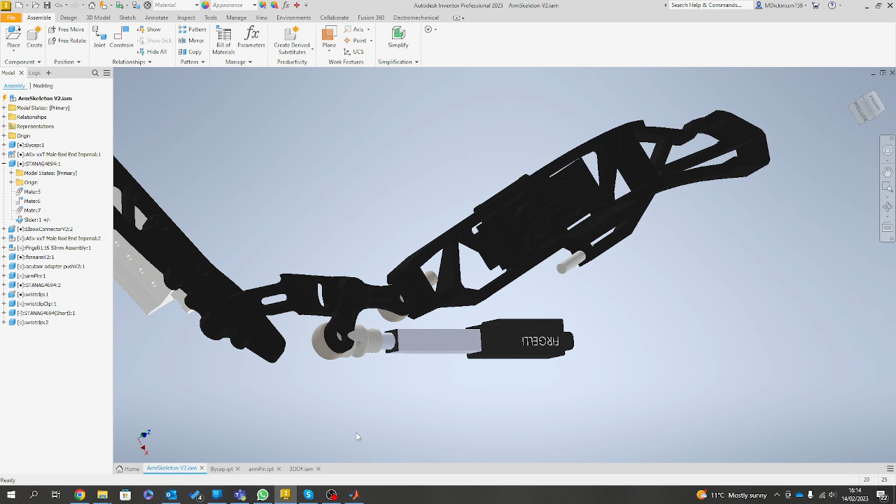So what I'd like to do is go through a simple example, which is this one. For those unsure what system I'm using, it's Inventor. I know at the university we teach SolidWorks, but the beauty of Inventor is to do with licenses. I find Inventor a little more supportive.

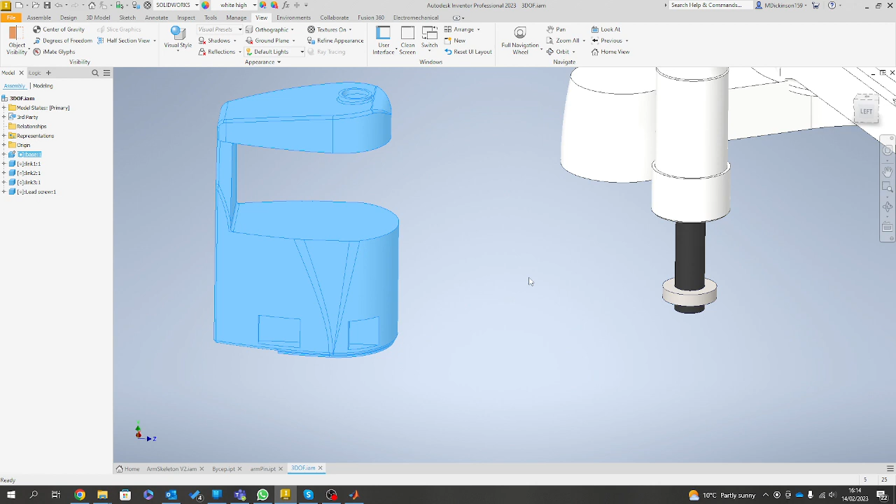So what I'd like to do is introduce a 360-degree joint around this one. Let's just pull this apart to give people an idea of how this thing is meant to be built. So I'm going to ground the base piece for where the arm mounts, which is here. This is assumed, well, it is actually ground. This is assumed to be an assembly.

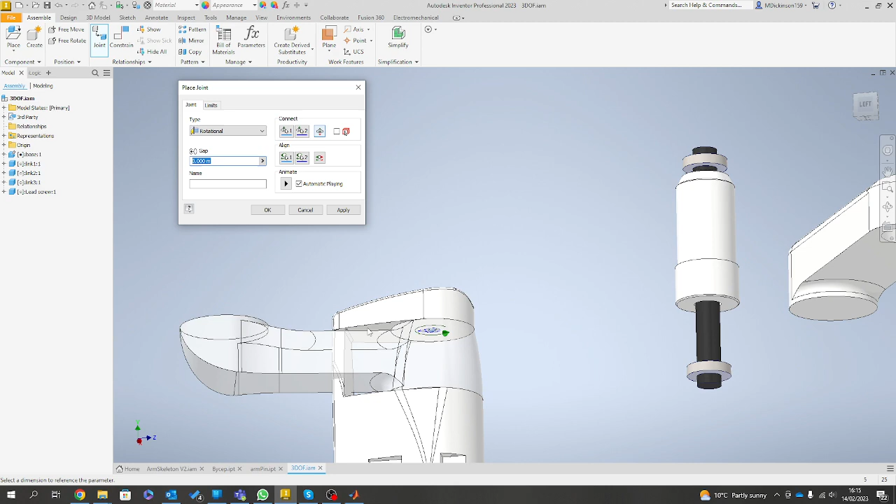Keep in mind, in your assignment I'm going to be asking very much the same thing. You're assuming a certain element of this. Some of the parts I'll give you are actually real company parts, some I fabricated myself, and some I pulled from reference places like GrabCAD, just to give you an example to operate with.

Now what I'm doing here is just applying the constraints. Those who've never used Inventor will probably start looking at this and think that was very cool. The joints constraint function, for me personally, is unmatched in any other system. I think it's fab, but anyway, this isn't about the CAD systems, this is about what we're doing here.

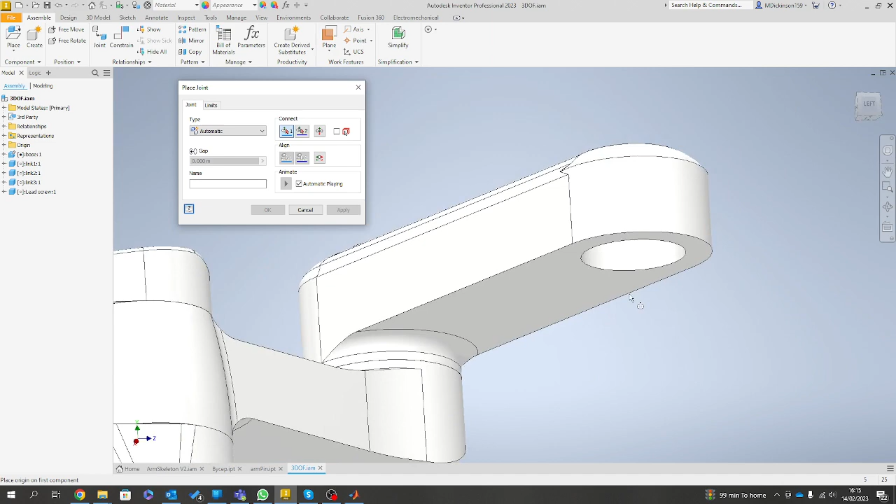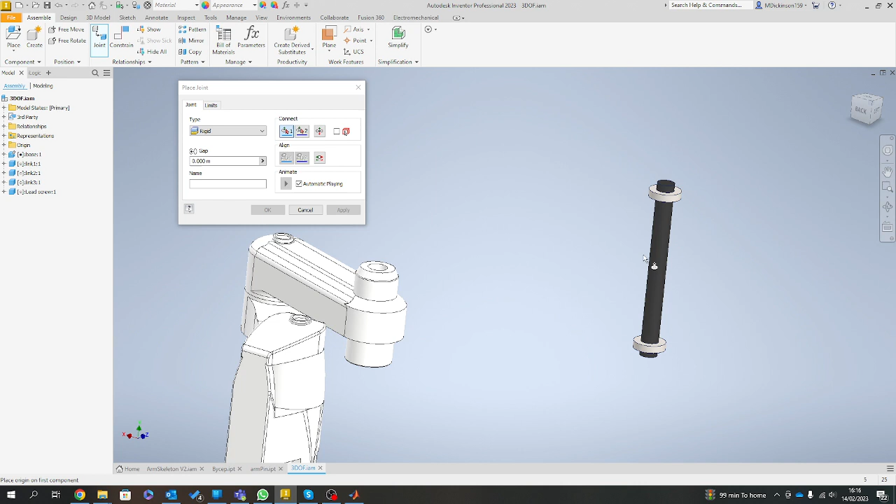So what I'm going to do is use my joints again, put a fixture there, and a fixture around there. Now it'll ask how I want it to function. I don't want this to be anything, so I'll just make that rigid for this case. Let's apply that. So now we've got 360 degrees here, 360 degrees here, and a mount point here. Arguably this looks like some type of rigid structure where it could actually slide backwards and forwards, so let's put a slider in here.

So if I go again—this isn't really MATLAB, well this is a MATLAB session and we've ended up talking about CAD. Really this thing could slide up and down. What I'll do for this case though is make that rigid too. Apply this, and that's really how our system is going to function for this quick example.

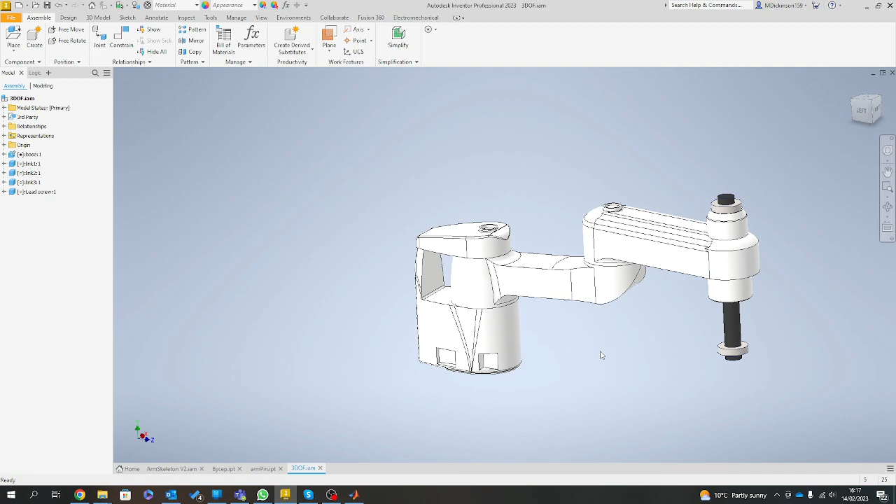So we have one here and one here. What I'd like to do is simply test this system, coming from over here, holding its position, bringing it right the way across, and then getting it to do a cycle in and a cycle back, something like that. But what I need to do first is decide how this is going to work.

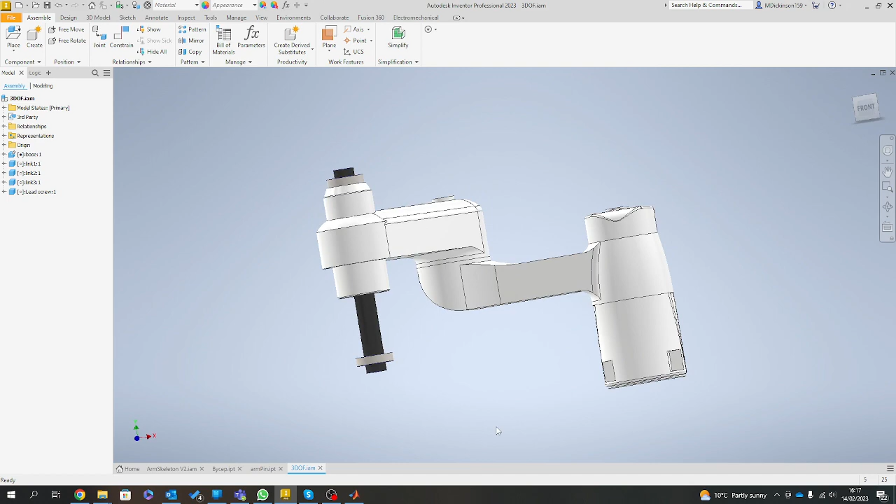As we're well aware by now, this is my base point, so this is going to be the point where I'm going to start from. So I'm going to minimize here, and I'm not messing around—I'm going straight into Simscape Multibody.

So I'll drop into Simulink, and as ever, we now wait a moment. This is on my home PC, so it's a little quicker than what we get with the university options. So again, blank option.

We've done this so much now that I'm not going to make slow, massive steps through anything, because I'm well aware you guys should know about the base thing we do every single time. We set up that base testing element: this will be our solver, this will be our rigid transform to give ourselves an origin, this will be a world frame, and our mechanism configuration. Once we get all this into play, let's get this built, and then let's take a look when it works.

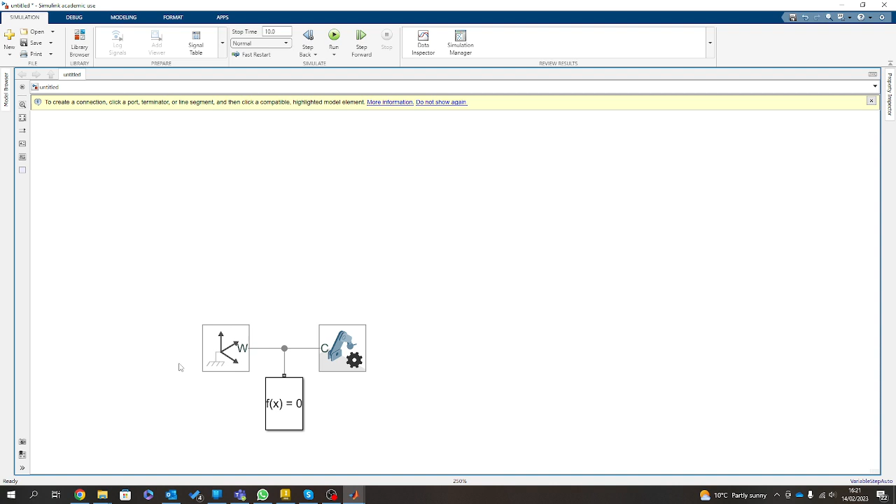Lots ask me why I always do it in a triangle - it's just because, yeah, it doesn't matter. Anyway, let's move on.

So this is what I'm chasing - these components are all in the notes, by the way. There is no write-up for this, so this is why I'm recording this session, because I appreciate some of you will want to give this a go anyway. So let's get this built.

First things first, I'm going to go File, Solid. Let's bring that in. Let's just call this base.

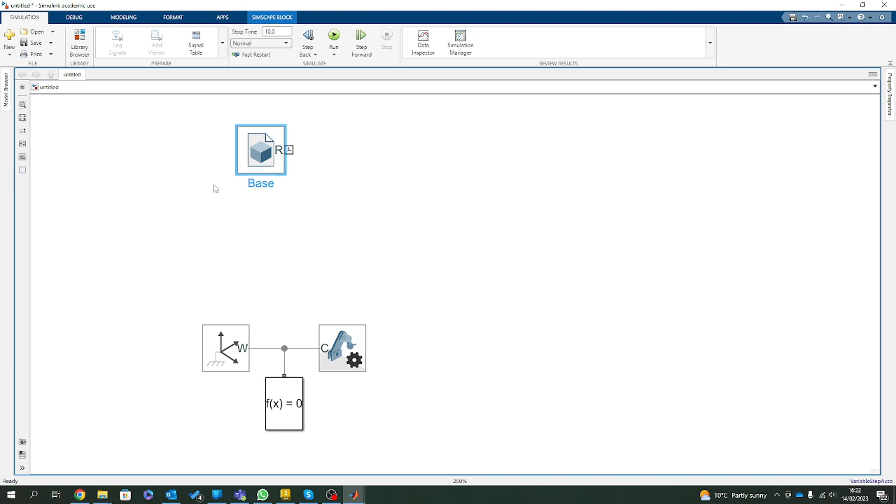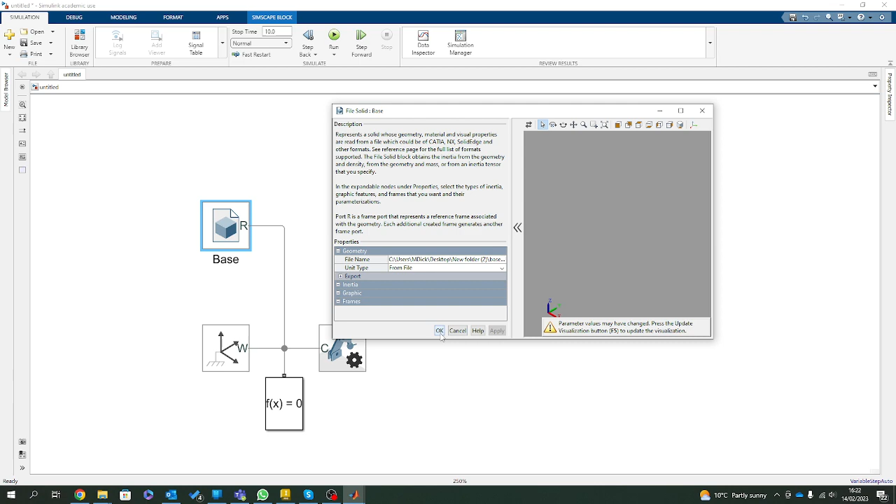Now the beauty of this is I'm going to be really sneaky - I'm going to use something called frames, and this is quite nice because those of you who go through this video will be like, ooh, why have we not done this all along? I've not tried to be awkward or difficult, but it makes life so much easier. I wanted you guys to go through the pain of building these things, and then when you realize what frames do, you'll be like, oh my god, why have we not done this sooner?

And am I sorry? Not really. So there's my base - I'm going to choose a density. Let's go custom mass, something relatively heavy-ish for a single base, so I'll go 4 kilos. Update that for 4 kilos - that gives my density and moments of inertia.

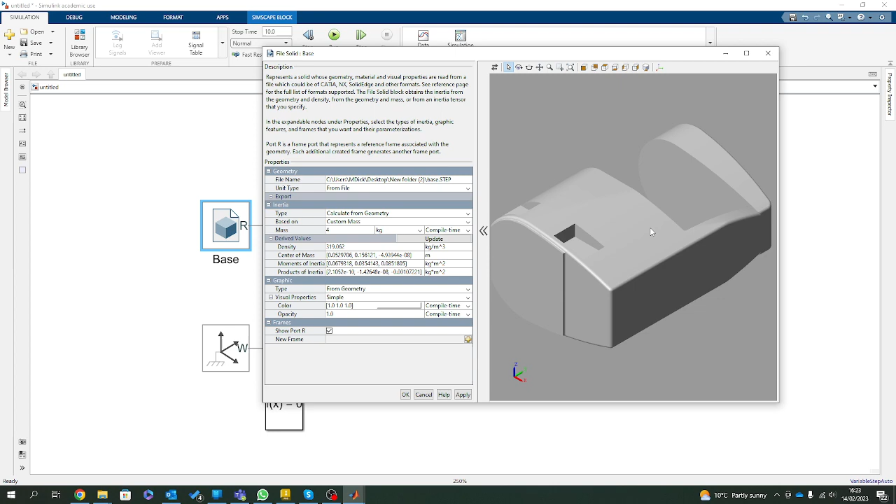And then, right, so this is where you're going to go, what? Well, you might do, I'm just saying. So there's my base - I've changed it white just because, well, the original was white.

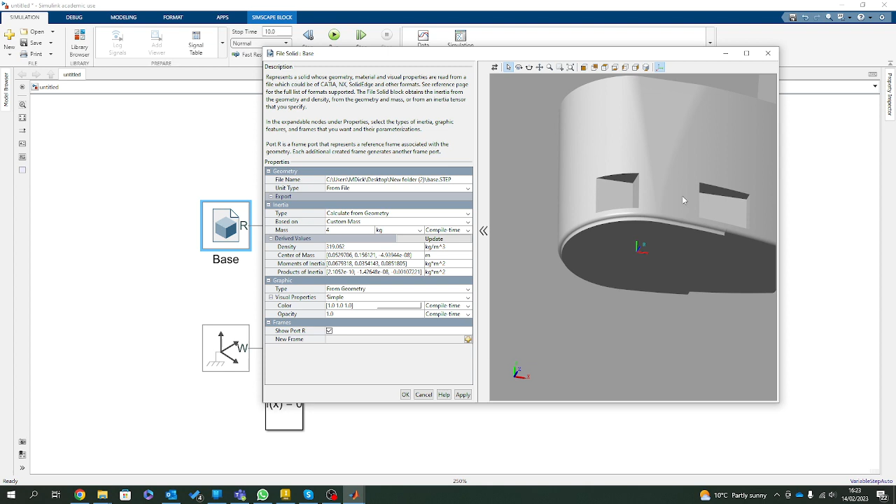So what I'm going to do is use this top as my key point of frame - I'm not going to change that R. That R, if I slip onto my piece, actually starts from the base. But we do have some problems - oh my God, do we have problems - Z is in the wrong axis.

I'm going to apply there and bring in a new frame. I'm going to go dead steady - well, I say dead steady, you guys can hit pause or rewind. So what I'm going to do is click on the top edge. What am I going to call this next one? Let's just call this arm link, or AL1 - arm link 1.

I want to use the geometry reference. I'm going to click on, and I'm going to use that one. See how I clicked on the edge there? Now look at that, see how that just shows me where my center of axis point will appear when it appears. So I click OK.

Oh, right, so let's zoom that in a little bit more. Look at where the reference sits. Everything defaults itself to Z. Pain in the backside, nightmare. So what I need to do is get that Z to flip itself up.

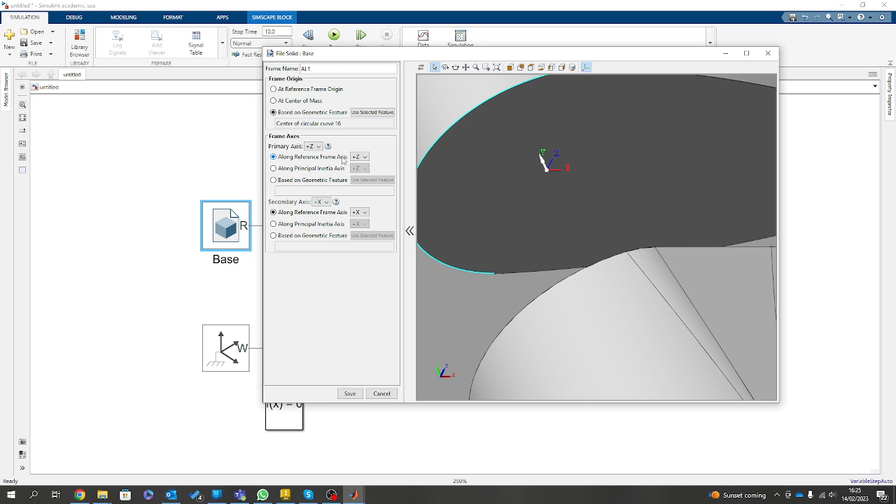What I would like to do is make Z where Y is. So what if I say make primary Z along the reference axis of Y? Ooh, all that messing around that we did in past sessions all solved in one single step.

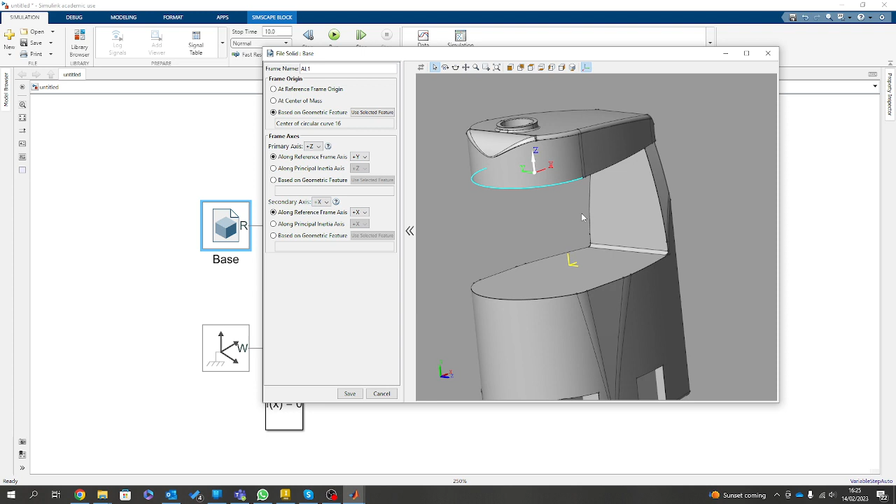However, if you're on a closed loop, you've got to be aware of where you've changed and when you've changed. So this is cool for robot arms, very quick for robot arms. But for something like a closed loop system, like an engine and cylinder system, anything like that, it can be a little bit more tricky. Not impossible, but a bit more tricky.

So I'm going to click Save and then Apply. Now what happens if I flip this little bad boy over? Now what happens is I have the base that's connected to the ground, and then I have AL1, which is now telling me is the connector. Boom. So what I'm going to do now is go revolute.

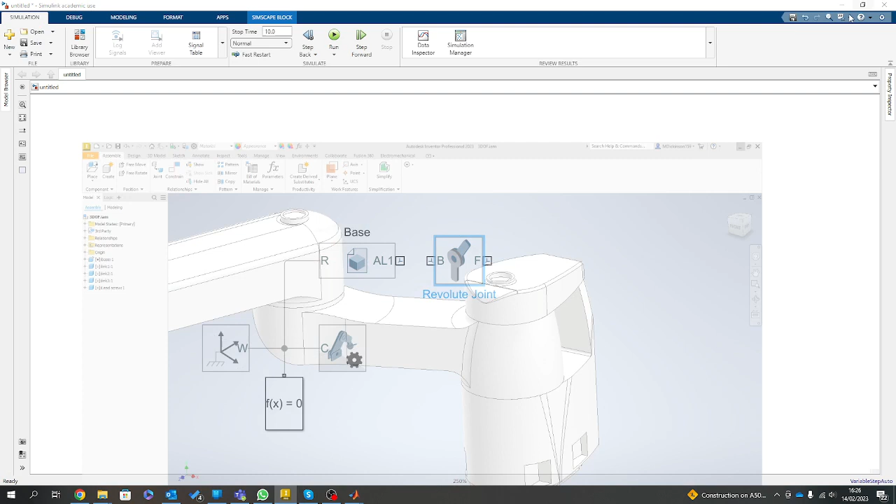Again, I'm not insulting intelligences, let me just have a quick spin. You look here, this thing revolves. Base to follower, base being the joint of the robot, follower being the arm that is connected to it.

Let's bring that across. Or in fact, in this case, let's not. I think it's probably going to be better to just build one from scratch. We'll go File Solid, and let's just go, I don't know, bicep, whatever, arm. 1 or 2, whatever, Arm 1.

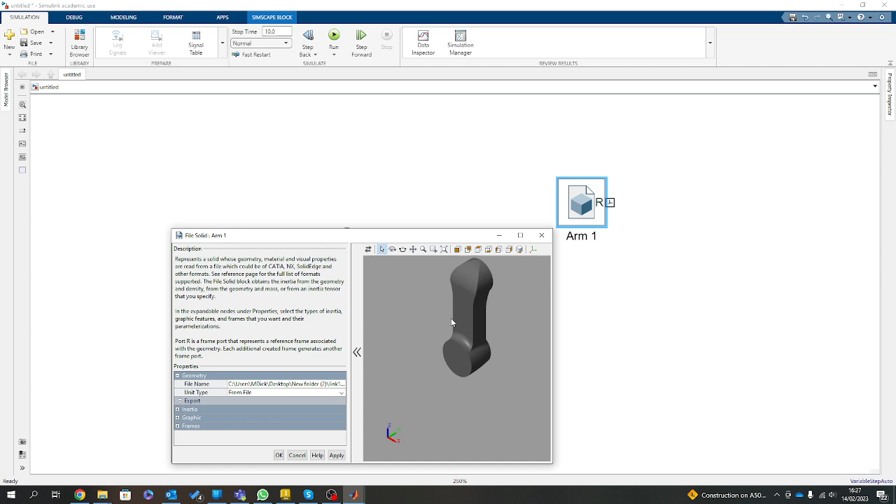Right, so back onto here, and then we go here, and then we're going to go link 1. F5. Boom, that's my link 1.

Okay, so I come onto my joints. You look, now this is annoying. You look and you go, what tool did that? Look at that, you see where the actual Z is.

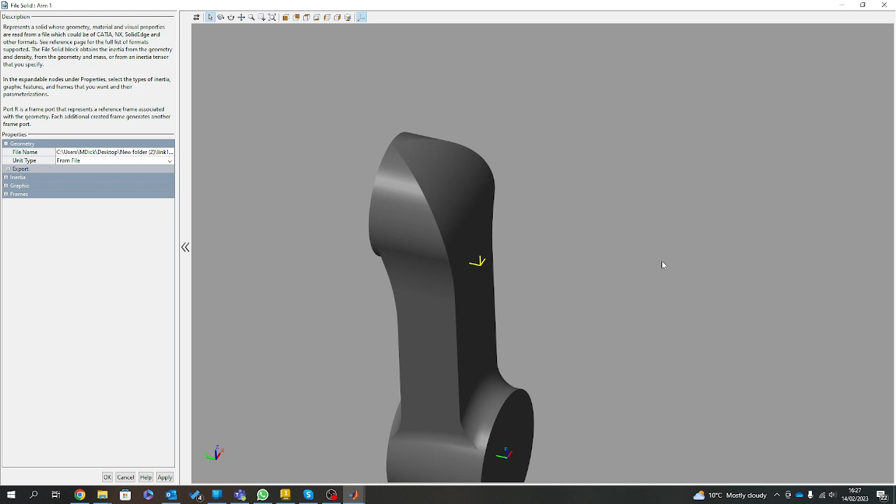So I mean, really, when this was drawn, it was drawn like that. Anyway, I suppose it's relevant. I didn't draw this, I didn't draw this, it was a company download. I thought it might be just good for a bit of an example.

Okay, back to the point. So we're going to go back again. Let's put some material on this, let's give it a little bit of density. I'll make this a bit lighter, so let's go 2 kilos, give that a bit of an update. And then, because if I knew the material, I could set a density, as we all well know.

What I'll do is drop that to here, and then come out, and then set that to a white. F5, there's my white. And then I need to set a frame. Frame in this case, again, let's go the arm link. This is base. Oh, arm link. Set by geometry.

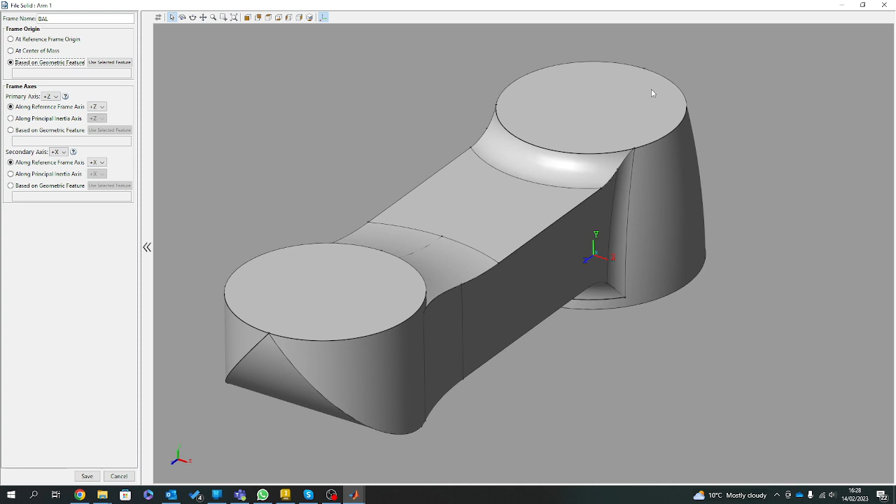Apply. Again, I'm following the same thing, I've got to make sure it's in the same process here. So I'll go set that to positive Y. And what these will do is link each other together. It's the same thing as anybody who does constraints - if you do a constraint, you've got to do it so it actually follows suit correctly.

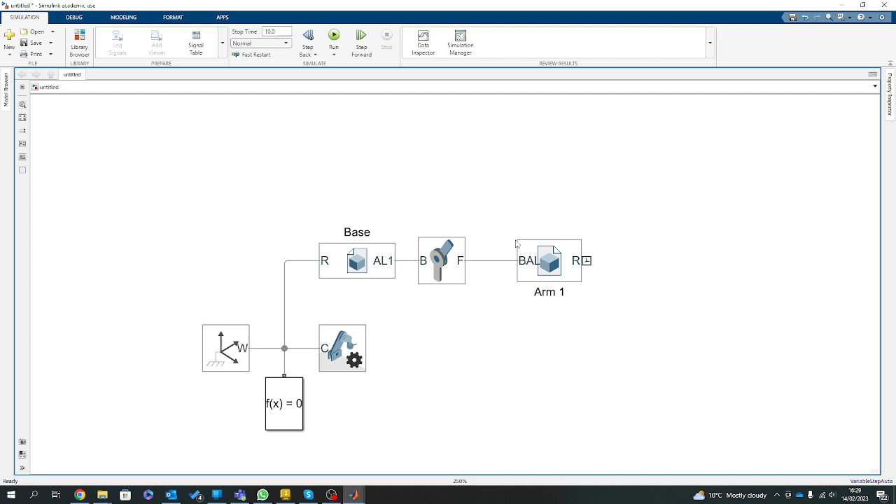So if I click there, what I should get in a moment is an arm, which, don't get me wrong, there's probably going to be collision, but I don't care. Just want to get this in position. Once it's in position, I'm in a great position, because I can then begin to look a little further. Spin it up. This is a great start.

So what I need to do, will just keep, because this just thinks that it's an ultimately perfect bearing. It's going all the way through. Useless for what I want. Okay, right.

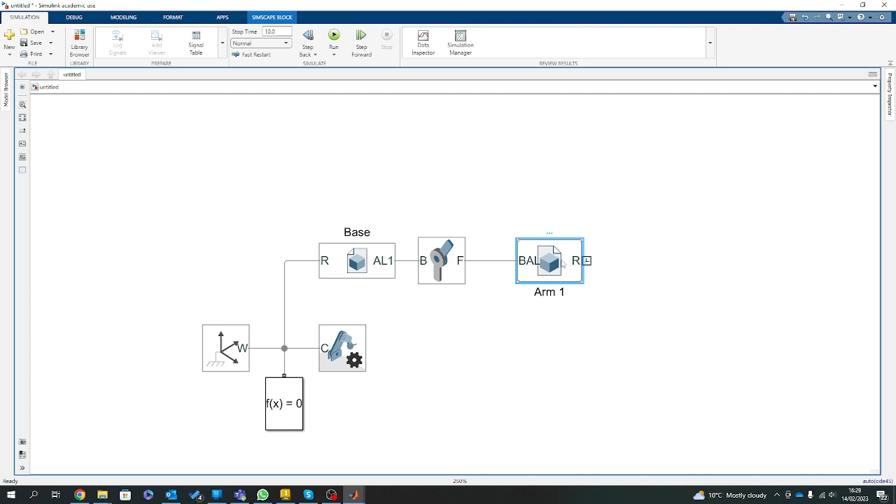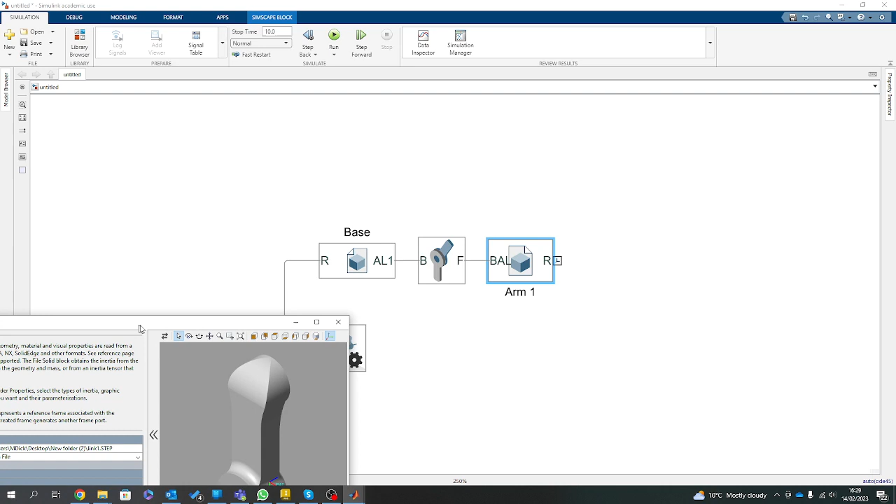What I now need to do is bring this back up a little bit, and I need to add another frame, because if you notice, my R in this case is useless. My R sits over here, so I'm going to pull the R off completely. Press F5. Now what will happen if I come back, you'll notice, if I click apply, you'll notice, let me pull it out.

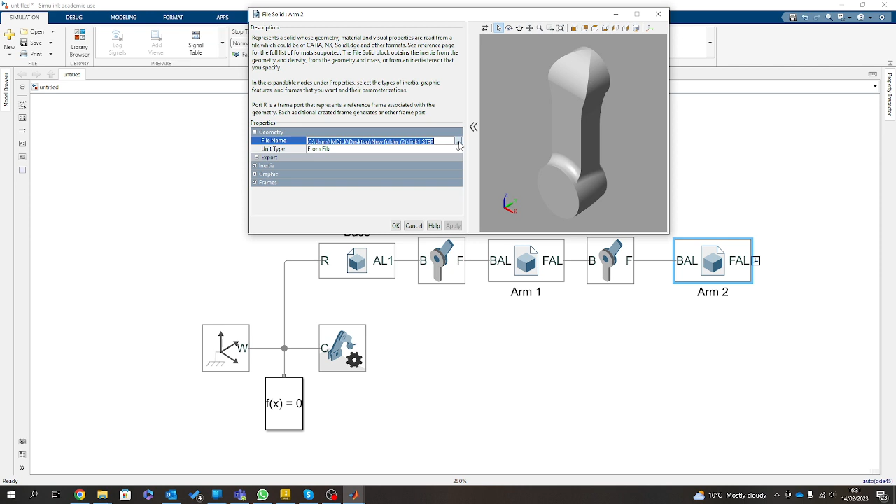You look now, I've now got the front and the base, well, follower base of the actual assembly. This is so easy to put together now. It's, it has to be illegal. It's so easy. So, bring that out. Because you got to remember now, I'm just doing the same thing. Bring that across. And this is arm 2. Oh my God.

So what I'm now going to do is just jump this across to my link 2, and then onto my link 2. So if I link 2 on here, that's my next positional point of link 2. Now, my base follower in this case is not there. So what I actually want to do here is just select it to mirror what I've done here. So it's there. And then click save at that. If I go back to it, what it should do is not move, which is perfect.

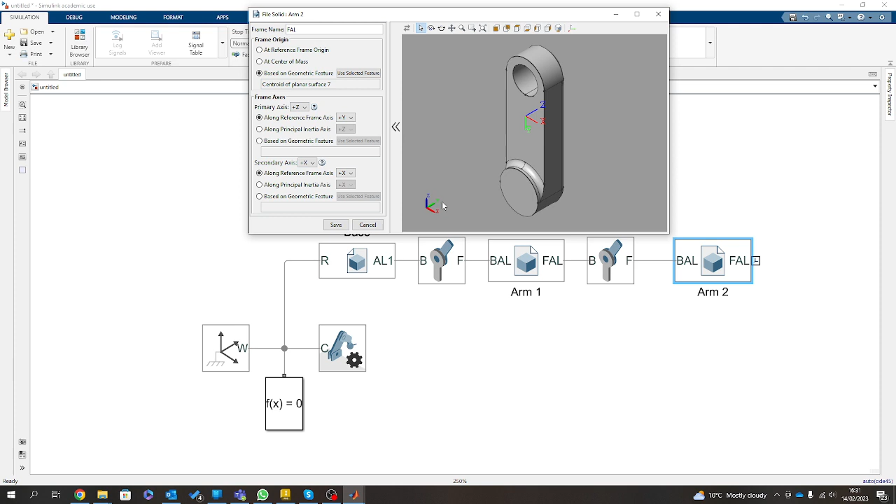So there we go. Click save. And now what I should get is the base of what I was after. So I'm going to do the same thing again over here, but this time what I would like to do is do it just from above. Now you notice we're actually now operating to a hole. Not perfect, not impossible. So I click apply and save.

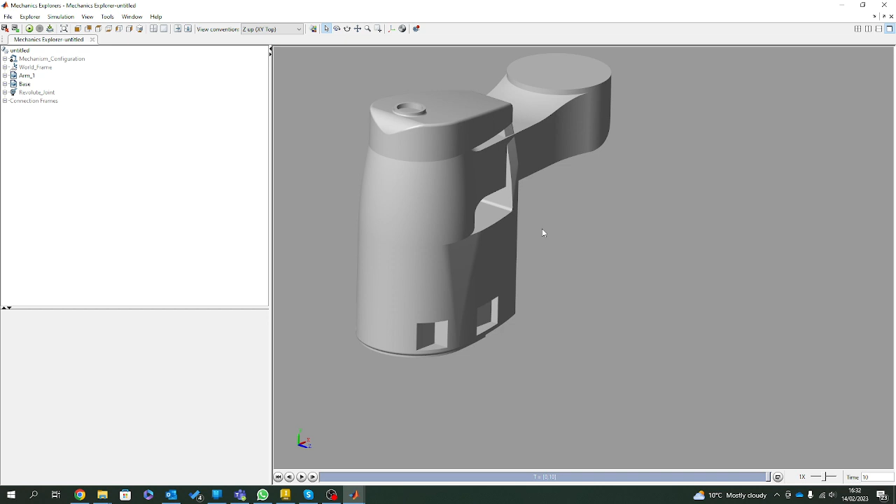Again, you'll notice here I'm going so quick now, as I said, it gets really easy. So I'm going to run that on 3. Oh yeah, you look now. So if I'm just to reflect back on the original design, the only thing I'm missing now is this piece. So let's get that next piece in, and then we can actually look at where we are.

So the next piece is a little bit tricky. What I'll perhaps do is I might just put a weldment in. A weldment is assumed that when this puts into place, it is rigid, that this thing is rigid in place. I can change that, but I'll just go with the weldment in this case. So let's go weldment.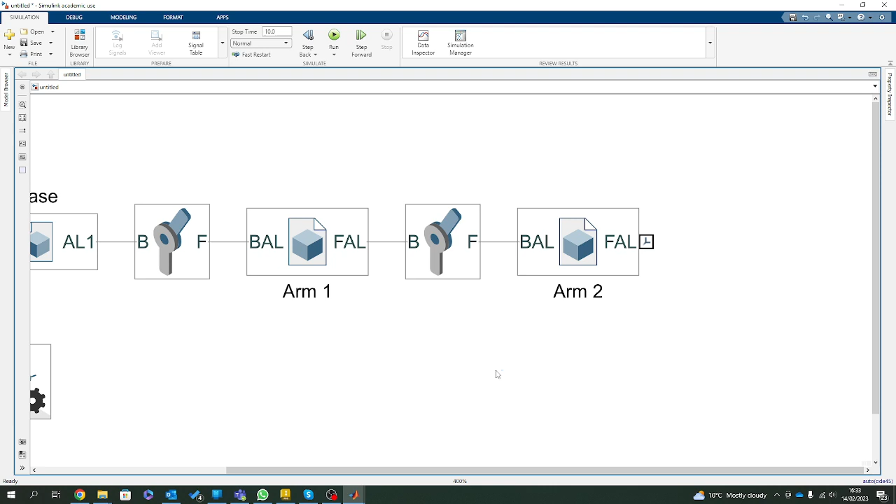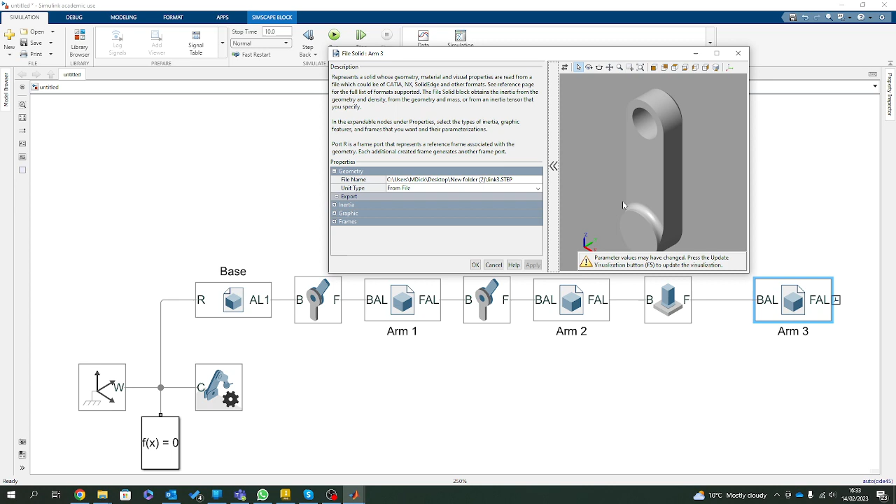This weld joint, as I said, will allow me to bring in the final piece. So that's 2, let's go 3. Yeah, what's happening now is it's complaining because it's saying you've got all these frames on here, but it's not sure exactly what the hell it's meant to do.

So with the file, I'm going to drop that off for the moment because all I really want is just to look at this thing in motion first. Let's just edit this. Now let's go to edit. So what I now need to do is just bring this round and then give it a position, which I will state the position from this particular point, and then save.

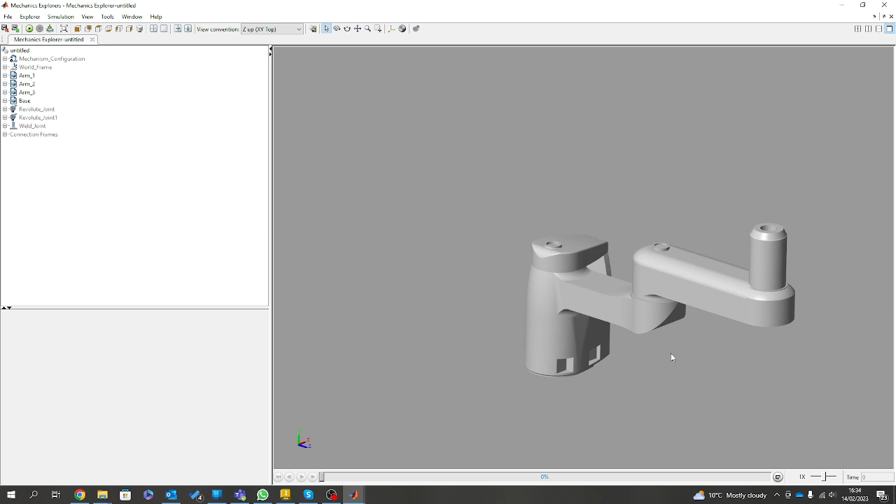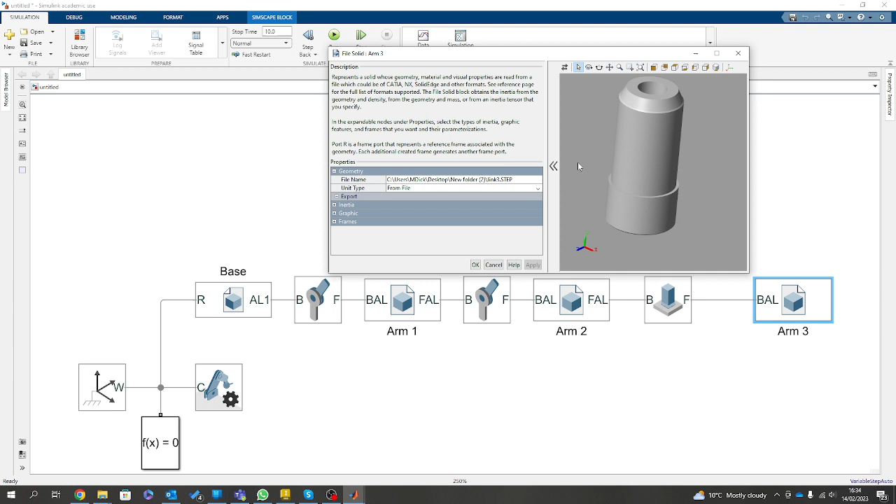Let's see if this works. Click apply. I think there's a problem with that, but I'm just going to have a look. So let's bring it in and go update. Now, see that? That's clearly upside down. That is because the actual part was probably drawn that way. When it was drawn, it was probably drawn extrusion, extrusion, extrusion, which, you know, fine, whatever.

Doesn't make my life any easier, but it doesn't matter. Where I've got it passing down the positive Y, I'll just shift this to a negative Y. What it will do by default is invert the actual selection. So if I come back and then update, now I've actually got what I was after. Now if I just run this, just to check, what I should now get is this thing spinning like bonkers, just going crazy, really. Right.

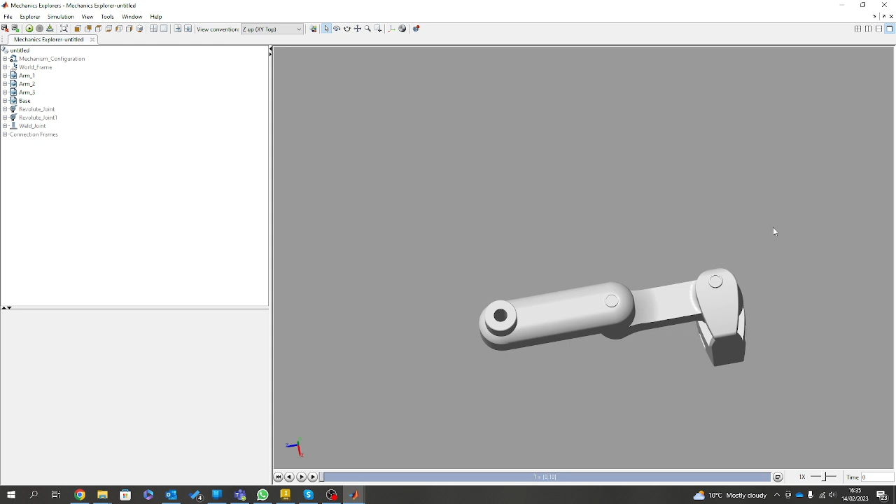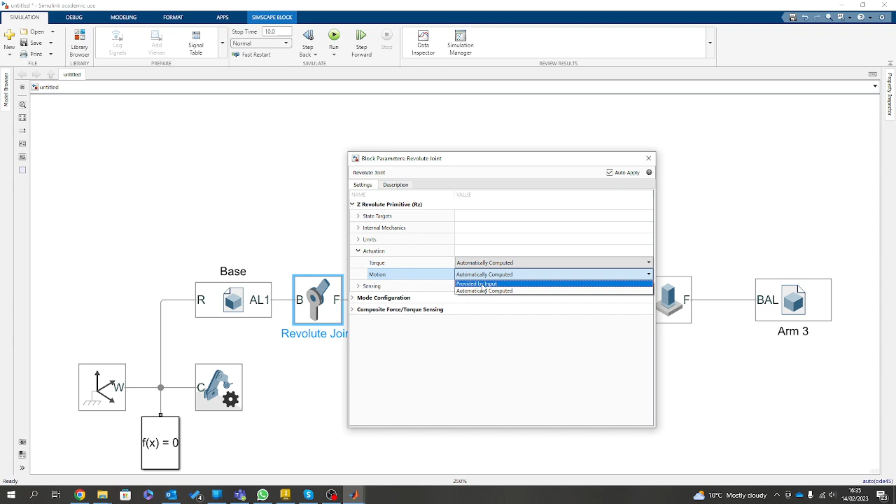Now what I want to do is I would like to perhaps do a 90-degree fixture. Let's go 90 degrees, and then let's go minus 90 and then 180 for the end. Okay, so under the first one, this is going to go 90 degrees. So I'm going to go actuation. I'm going to have torque automatically calculated, but now I'm going to provide motion, which is ace for stuff like this. It is insanely cool what it can do.

So let's come back and then jump into, oh, I've just gone blank. I remember, right. So this we now need to bring in because we're going to control with a signal control. So I'm going to go Simulink to physical signal converter.

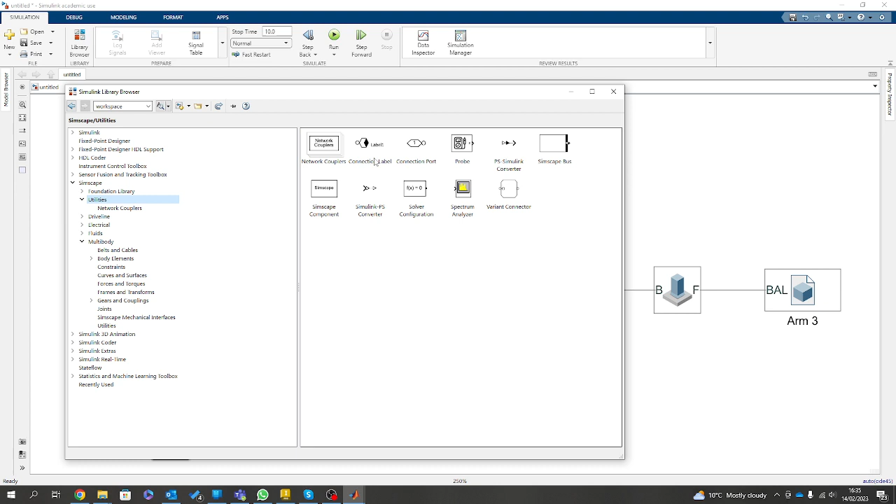So bring this to here. This now is going to give me my all important control unit, and I'm going to do signal. In this case, I'm going to do the signal builder. For those thinking, well, we didn't do that - we did, this is week 1. Don't forget, all signal builder does is it offers a unit, that's all it does. So I'm going to go degrees.

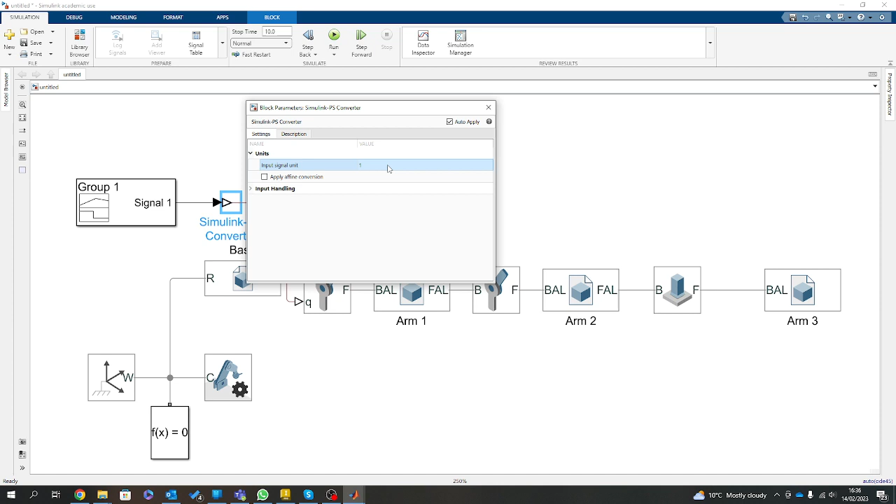I'm going to signal builder, and let's see if we can get something moving in the right direction. So we're running over 10 seconds. Signal builder is set to 10 seconds. What I was saying is over 5 seconds. Well, let's go over 4 seconds.

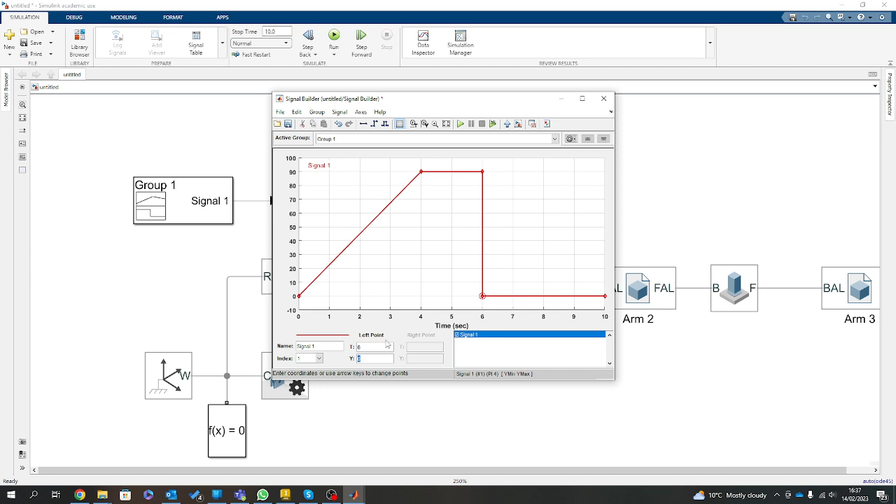We're going to get signal. We're going to get the robot arm to move from 0, and I want the arm to move 90 degrees. And again, 90 degrees. And then it's going to hold that 90. So this is absolute in what I'm doing right now. So it goes from 0 to, at 4, 90 degrees, and then holds that 90.

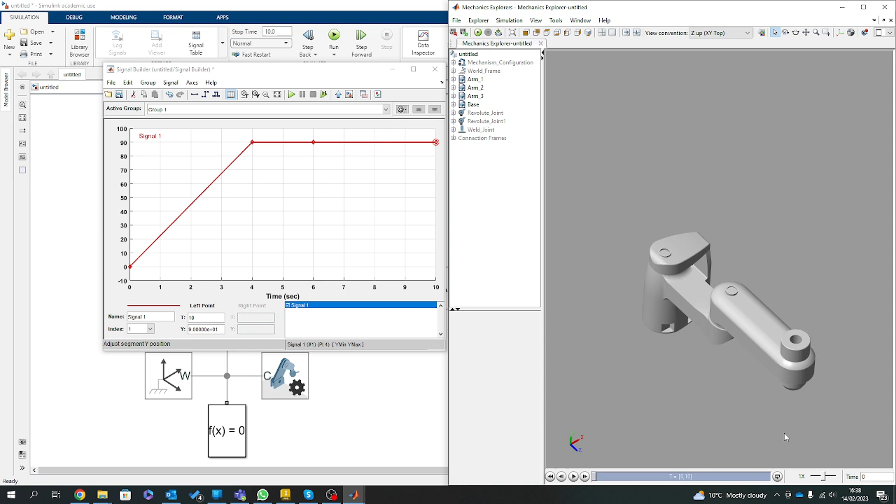Now what I need to be sure about is: is this going even the right way? So let's check it, bring it in, bring it across, let's just get you into a good position. As I've said before, this software, if it was up to me, I would be a poster boy - I love this software so much. So let's just bring it in, let's run it, so as it runs, it starts to calculate.

Oh, look at what you could have won. Let's have a look. Oh! Right, this is quite good. I made this mistake - you guys are going to come across this mistake. And what's nice about this is when you first see this, you kind of go, what the hell does that mean? They are telling you everything there, interestingly. But if you've never come across it, you kind of go, okay, yeah.

Okay, let's just jump back into here. Now, I made this - I'd love to say I meant to do this on purpose, I didn't, forgot. Remember, I'm actually going to offer a motor input. With any particular motor input, we know it's going to be second derivative just because we're going to have position, velocity, acceleration of that output. We're providing motion, not torque. So what I'm going to do is go to filter, drop down my filter, and then go to filter input derivative calculated. Ooh, I hear you say.

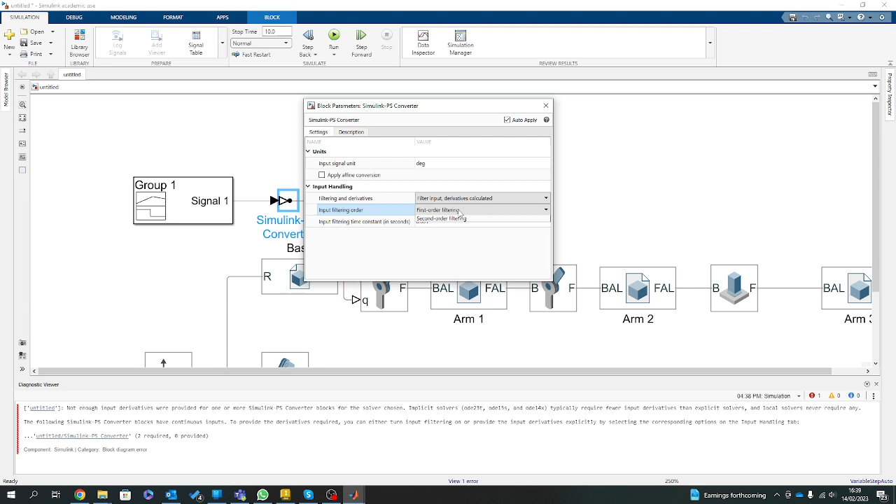So first order, don't forget, would just be taking into consideration the spring and damping aspect, or the resistor capacitor behavior. So all we really get here - what I actually need to give me the all important three elements - is that second derivative. So I'm going to go second order filtering. Now we're in business. So if I just come back, what it should now try and do is provide others. So let's just run this and see what happens.

Oh, no diagnostics. Now I've had students before sit there and go, okay, what happened? This is what happened. Now I know it looks like a total failure. Let's just recap exactly what's just happened here. So let me just get to a nice position - this is a nice position. Let's just rerun that again.

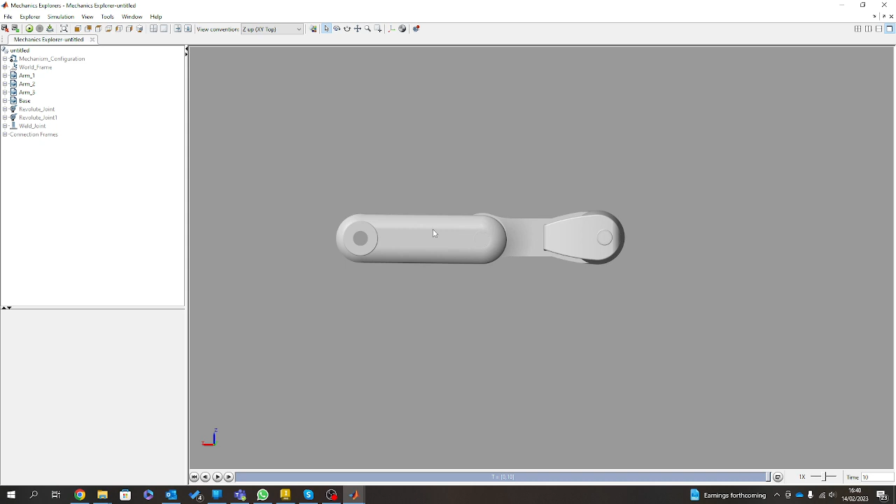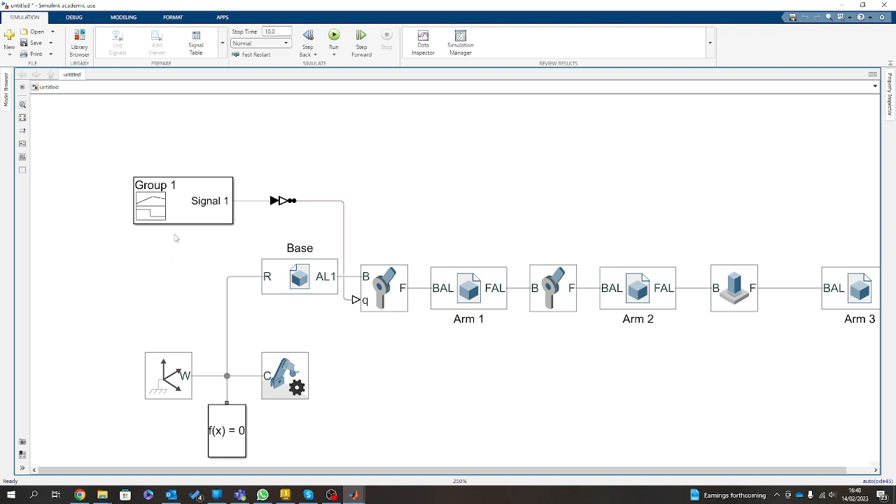We've just controlled the lower arm. Lower arm's locked into a 90-degree position and held it after the 4 second. We've now got a level of control. Problem is, I'm going the wrong way around. It happens, it really does happen. So if you do get that and it goes the wrong way, don't panic. It's just because you're going around the axis.

Funnily enough, I did know that this was going to happen, but I just wanted you guys to see the fact that you look and go, why has that happened? That makes no sense whatsoever. It actually does make a lot of sense, because this is absolute to its position. So that's all this is - having a bit of a wobbler about. Again, nothing wrong, it just needs telling to go the other way. So all I'm doing is going minus to actually control the behavior around the datum itself.

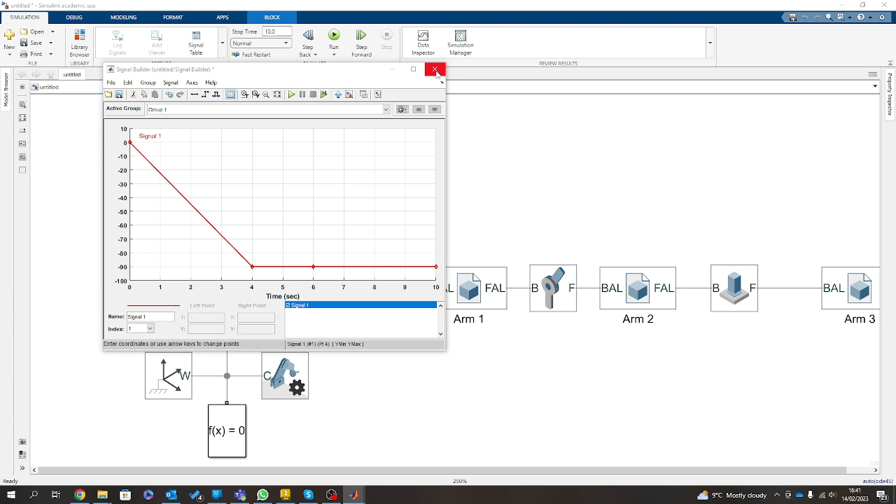So if I now run this again - oops, run this again. Oh sorry, recalculate. Damn. Right, see that? We're locking in, locked it steady, holds its position after 4. We can now commit to what we're talking about. Let's do a 90 and then a minus 180, so we should get a 90 across, then a minus 180, right, complete - then that will be our full cycle. Not the most complicated of cycles, I get that. However, it's a nice learning curve because you can look and go, okay, that makes sense.

So what I'll do is just come on to my next frame. And again, that was nearly a schoolboy error. But what I'm doing now is providing that all-important motion.

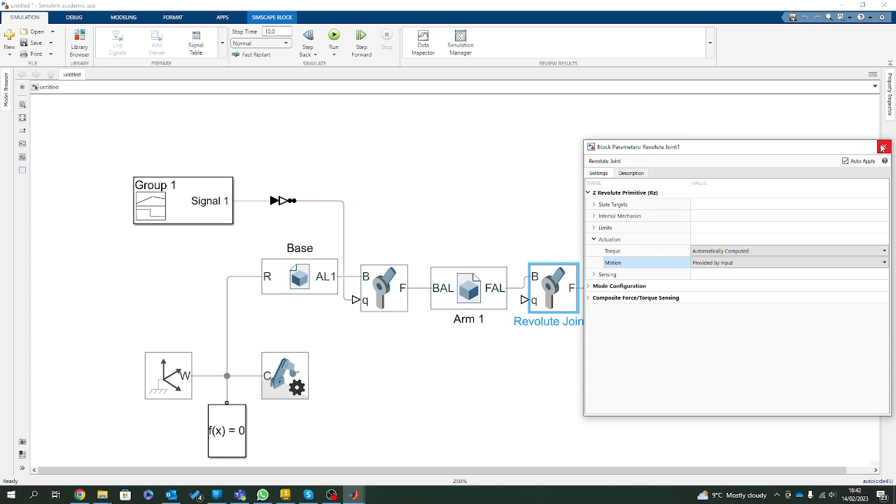So I'm going to bring that down, bring that down, bring that down. I am a stickler for having tidy representations of the work you are doing, so please keep that in mind. Just because it works doesn't mean it will cut it - I do prefer that you take that approach.

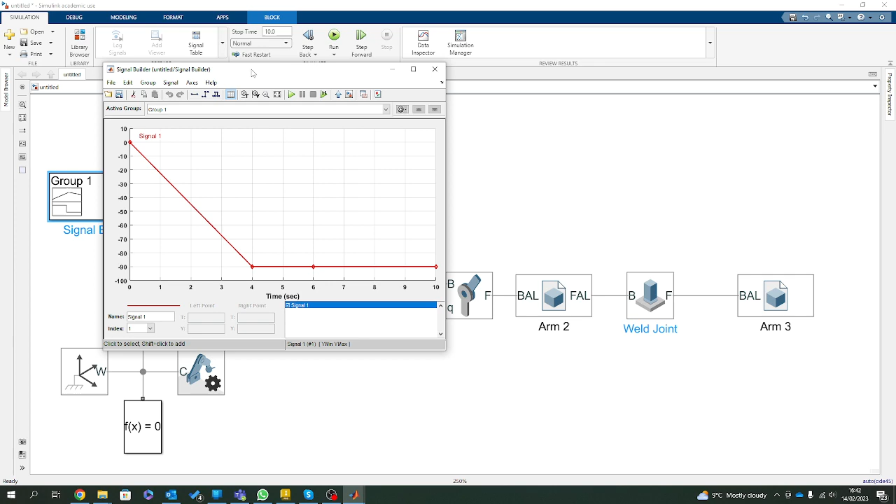So we know that we're going to hold a position and then we're going to go from our present state. Let's just push this back because this will get confusing otherwise. Spin this right the way back.

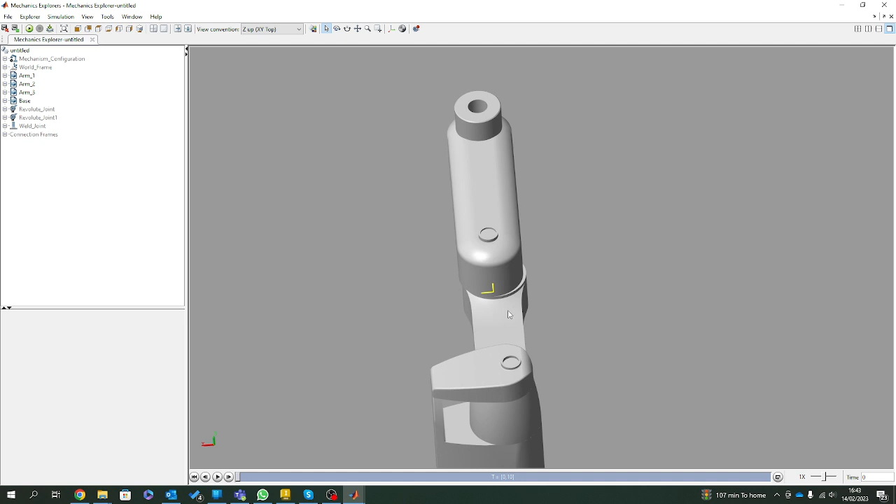So we're going to come from this position, and what we want to do is hold. I've just realised that is not middle - we'll have to move that, but we'll do that in a moment. Oh, that is not middle. I wonder if that's to do with a point I've chosen between that relationship. I will fix that in a moment, which has annoyed me.

So as they come in, we want to get to there, and then we're going to move 90, and then go minus 180. So I propose we hold 0 position, then go minus 90, then plus 180. So: 0, minus 90, plus 180.

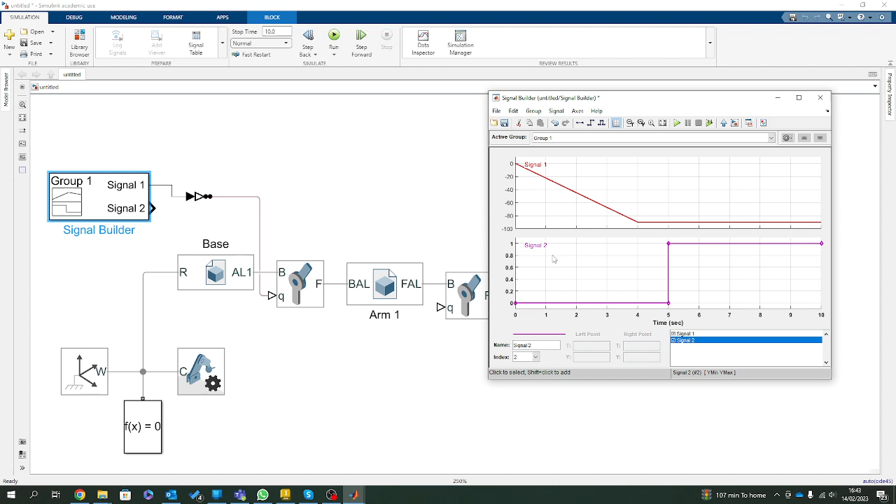I think a 2-step process would do, so let's add a step. We'll try this one out. It might not work - I hope it works. Saying that though, looking at that now.

I'm just going to play it nice, and I'm going to delete that one out - yeah, just get rid of signal 2. Bye-bye signal 2. So we're going to hold it, hold it from that 90, then we're going to go to 4, and then shift to 90.

We have to move relatively quick looking at this. So let's go, what, 3 seconds? Let's go 90. Do it over, so 3, so 7.

And then I'm going to go - so I'm going to shift this down to, let's just go 10. Let's just go 10, I'm way overthinking this. Let's go 10, and then let's go minus 180.

This is either going to work really well or just smash its way through the robot arm, which obviously would get me fired. But you know. Let's go minus 180. So go 0.

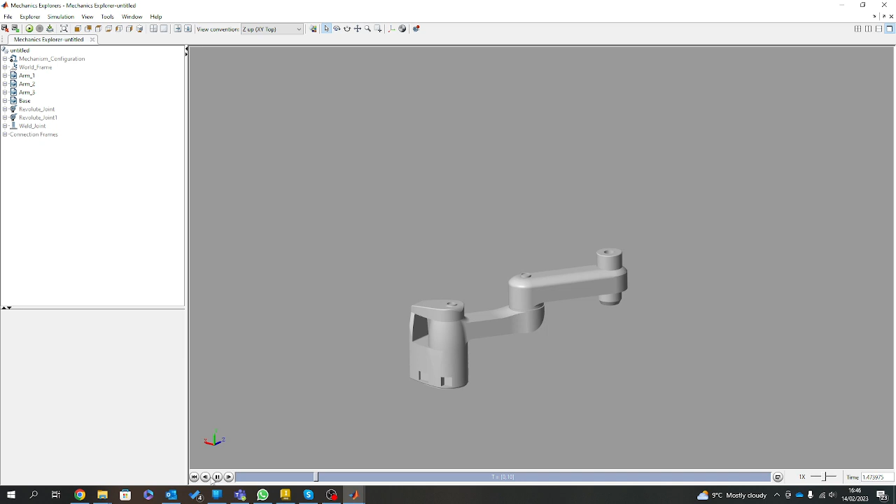Now let's just run that again. Through to 90, return back to 0, 90, then all the way around to 180.

Oh, should I answer that? Oh, I should answer that. That's just a bit of a prickish thing to do otherwise.

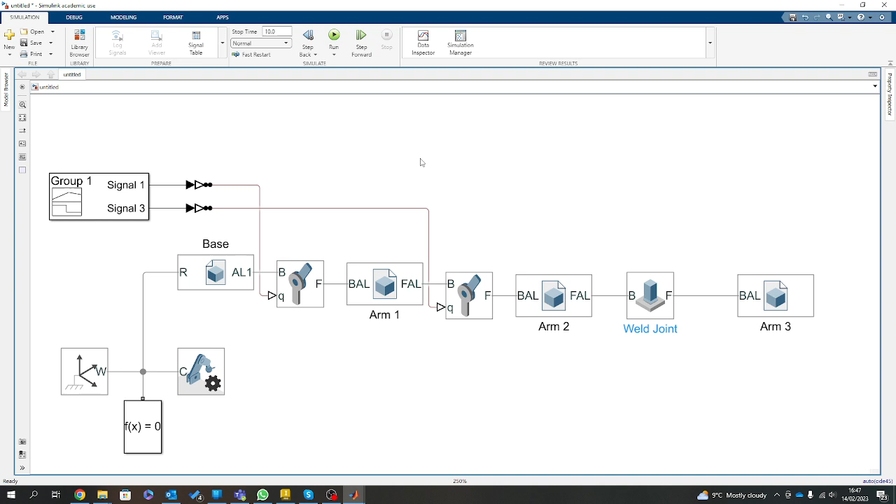So I said it's absolute, and I'd love to say I meant to do that - I totally forgot myself, I've gone minus 180. So that's 90 to 0, then 180. So it's bound to go through the arm.

So if I go minus 90, what it should do is perform that all-important full sweep I was after. Let's recalculate and run again. So it runs in, holds its state, holds back, just 0, comes all the way around and should hold at that 90. So there's my cycle.

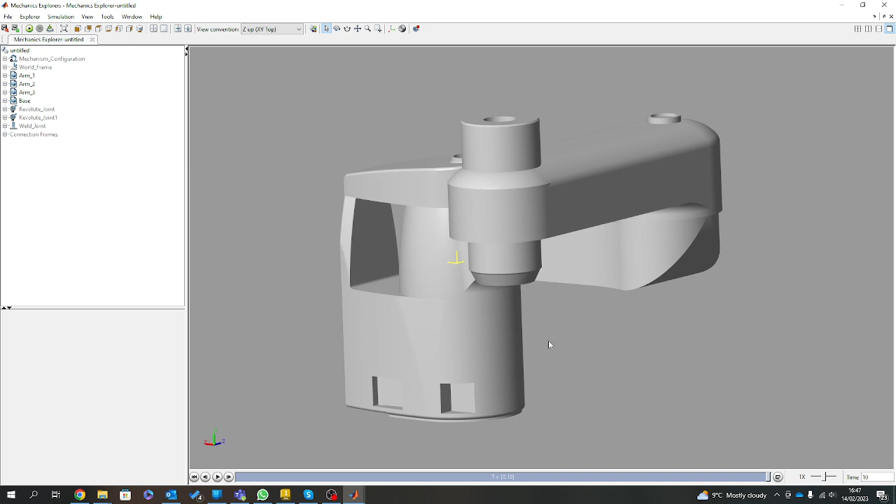So these are just visualizers, by the way - it just allows you to see what's going on. So I've now got my visualization, and I've now got a piece running.

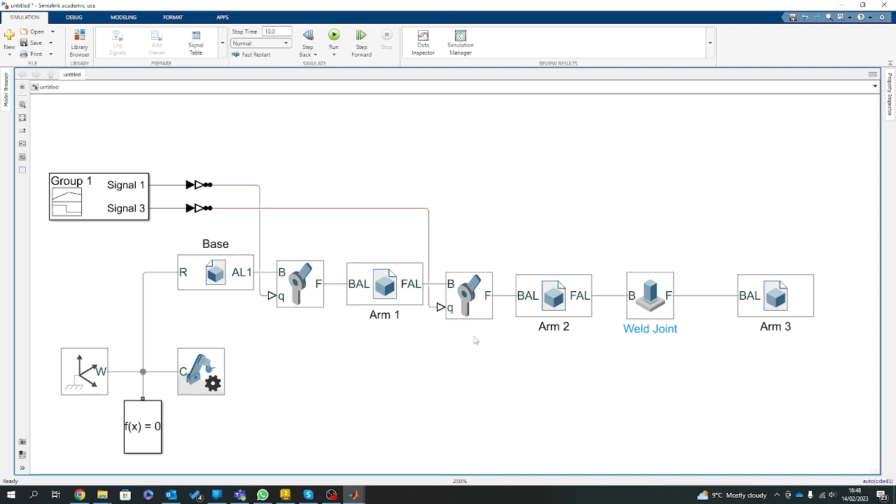So let's now start to extract a little bit of data. Let's see what the overall movement of that arm is - what does it actually hit, you know? So where does it actually go with that? So let's do a body first.

So I'm going to go transform - whoops. Transform. I want to go transform sensor.

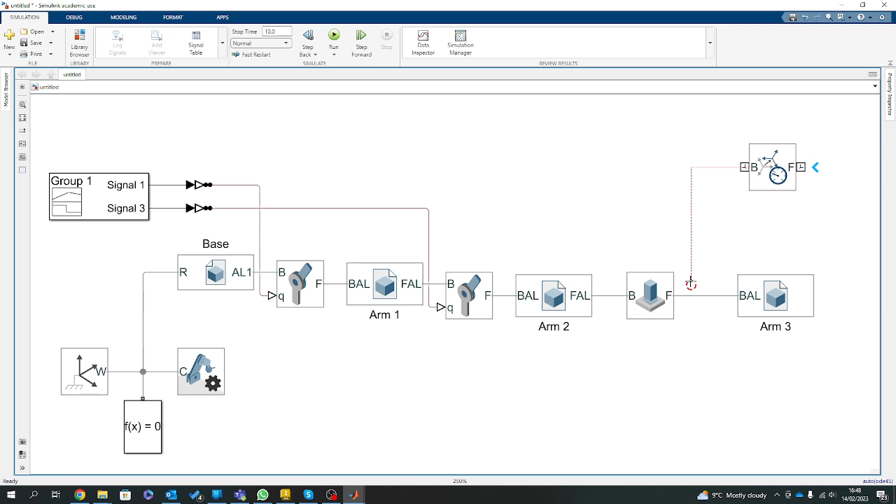So I'm bringing in the transform sensor, a great bit of kit this one. I'm going to come this back here like that, and then I'm simply going to bring in a world frame. This allows me to offer a reference, a starting point if you will.

So what I'll do here is from my transform, I'm just going to look at translations. Now I would like to see what the translational aspect of X and Z is, just to look at what that actually does. So I'll go X and Z, then bring this in, and I'm going to go an XY plot.

So I've got an XY graph. I really do like these. If you need to know an overall space, if you need to know what's going on, what's happening, these are so good. So I'll go PS-Simulink converter.

So this now brings in the PS-Simulink converter. There we go, now it's that way and that way to there. Then bring that down, let's go there and then to there. So that's just snapped all these bad boys together. So I run it back in again.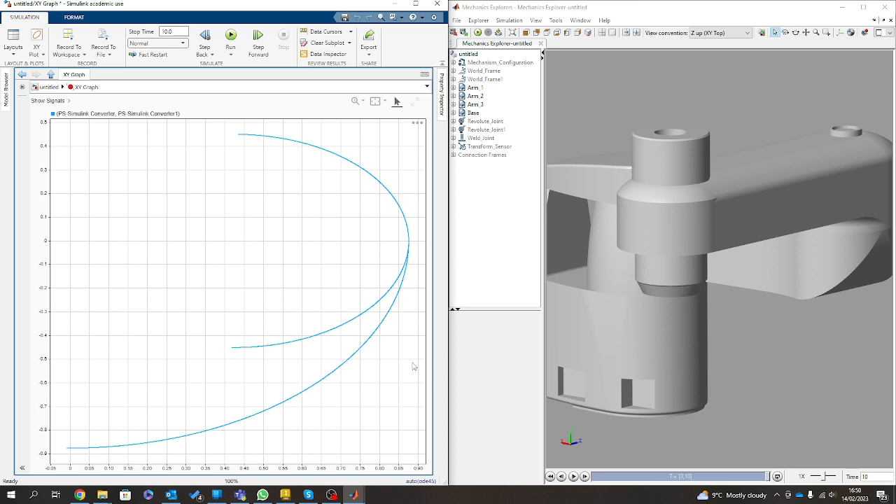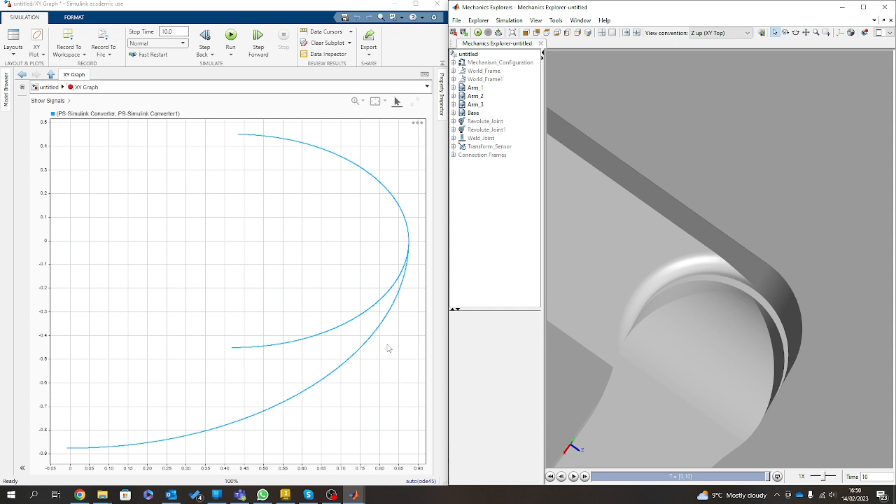So let's bring it back. So you can see there, you can actually see there it's not straight. You see that? That just tells me that that has been mounted incorrectly, because you see there it's not a circle, it's actually an ellipse, which is really interesting.

We'll fix that in just a moment anyway. In fact, no, let's fix that right now. So let's just take a look back. Where did I go wrong? And I'm betting you it's coming from...

Well, let's have a look at the base on that. So if I check that as a marker, yeah, you see, if you look there, it does look out. So let's just try that as an edge and see if that fixes it.

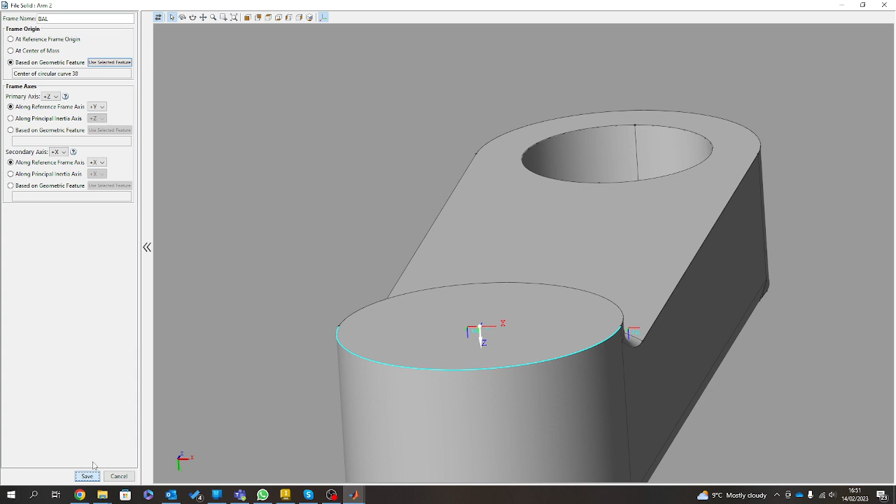It didn't look right to me now, it didn't look right. So let's just pan that back, recalculate, and let's just pan it back up. And you look now, it's looking a lot better. So let's just rerun that through again, and snap you across.

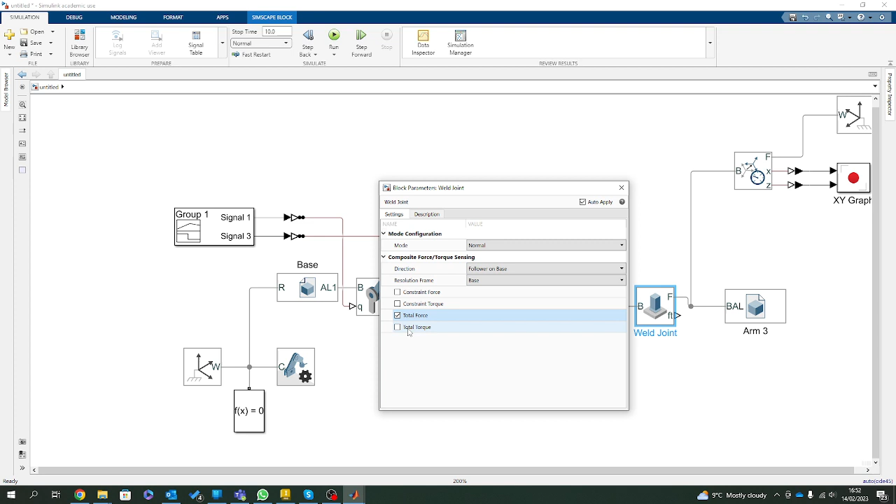Well, I suppose it gives me a lot more there. Okay, so we've now got a control of here. What I'd like to also do is actually consider what's happening around the composite elements for the forces. So let's just consider the total force that's coming out of here. Lots to be seen from this. So let's bring that across.

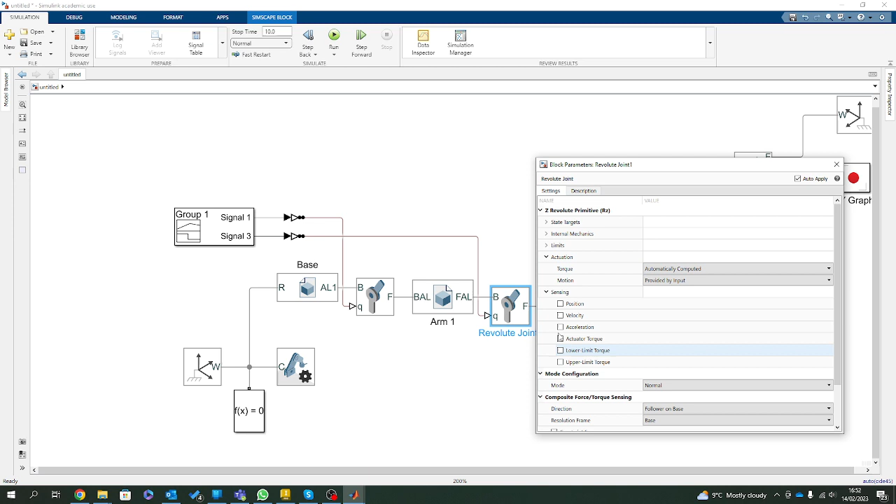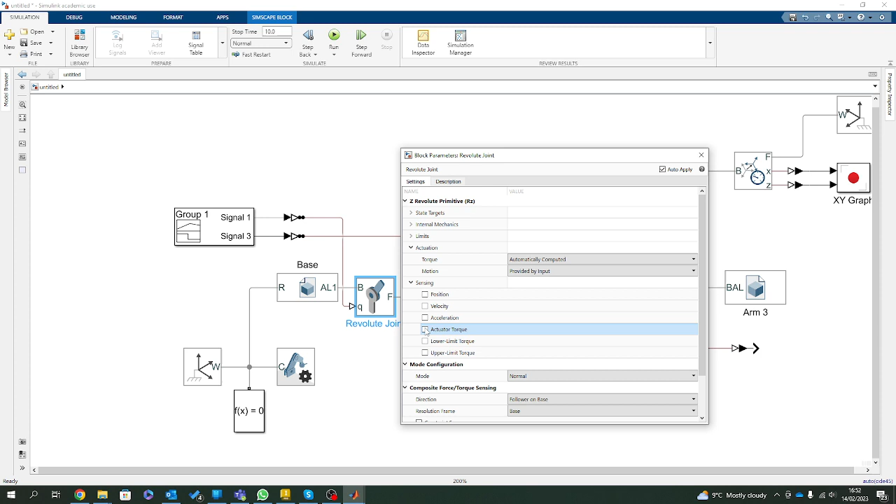You know about units by now, so I'm not going to insult anyone's intelligence with that. I'm going to go to sensing in this case, and I would like to bring out the actuator torque, because don't forget, I added in actuator torque, so it's automatically calculated now. And I'll do the same here as well, I'll go actuator torque. So now what I'm getting is a real performance snapshot of how well this thing's actually doing its job, and if it's any good, because it's all right doing it, but it might be absolute rubbish really.

So bring this in, and then to there, we'll snap you to here, snap you to here. Right, so let's go scope. And then I think really that is the example of this arm.

So I'll bring this in and then let's just have a look. So I'm going to go 3 outputs, I'm going to go 3 over the top and go like that. What I'd like to know is, oh, there is one big thing actually. Run it in.

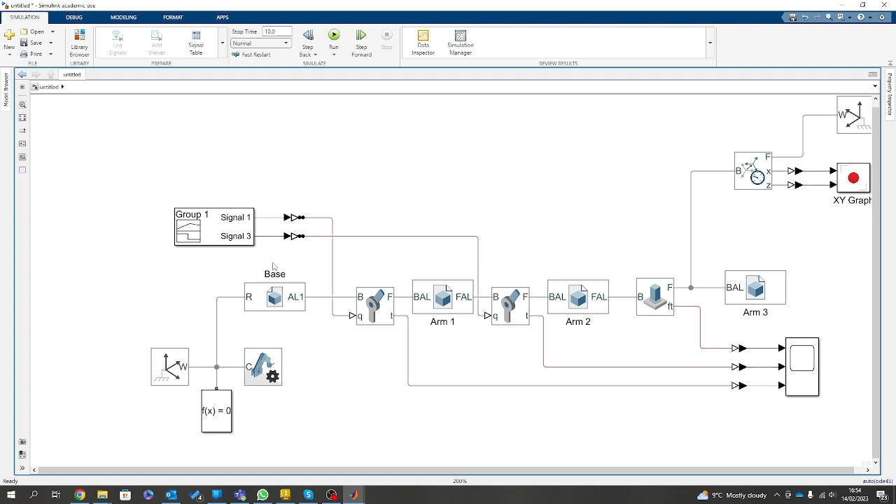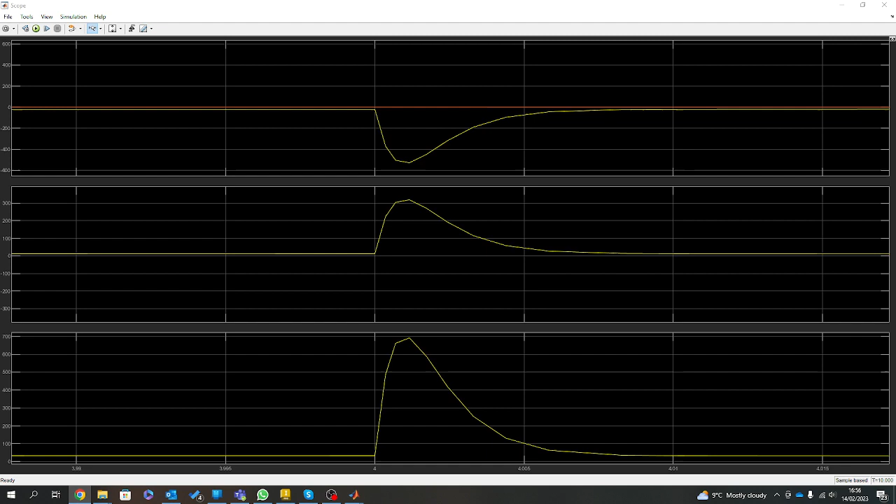Now you go above because if you just scope a motor to operate at 100%, it's the same as setting your motor to, like going out in your car and running it to 100%. It's the same as doing that, and if that's the case, then you are just a glutton for punishment - that's what this really is. So when you're selecting these motors, the thumb-in-the-wind assumption is 70%. Whatever you're calculating to be your maximum is going to be 70% of the overall of what this thing can generate. You don't run it to 100%, or else you're just getting yourself into trouble.

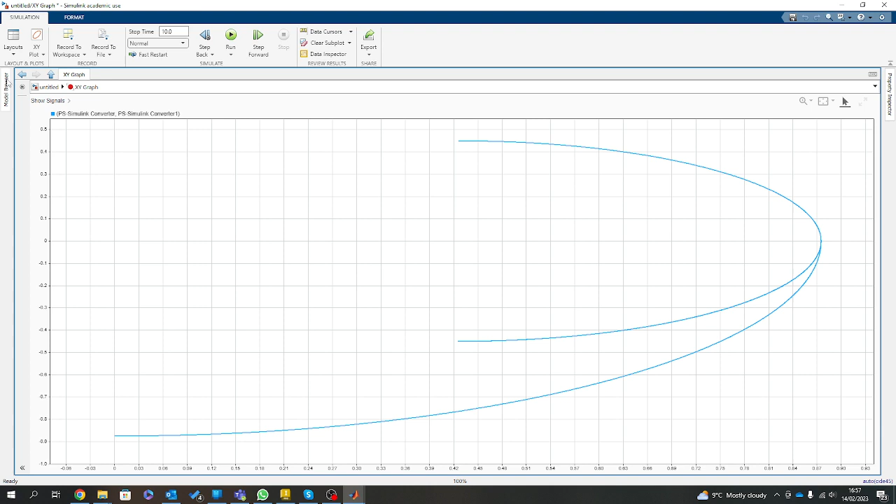Okay, so in itself, we've been able to establish a motor which will be able to do what we need it to. I've got an overall coverage of where the arm actually sits. By default, I could control this to tell it to move in a different area, to tell me which way to go, things like that.

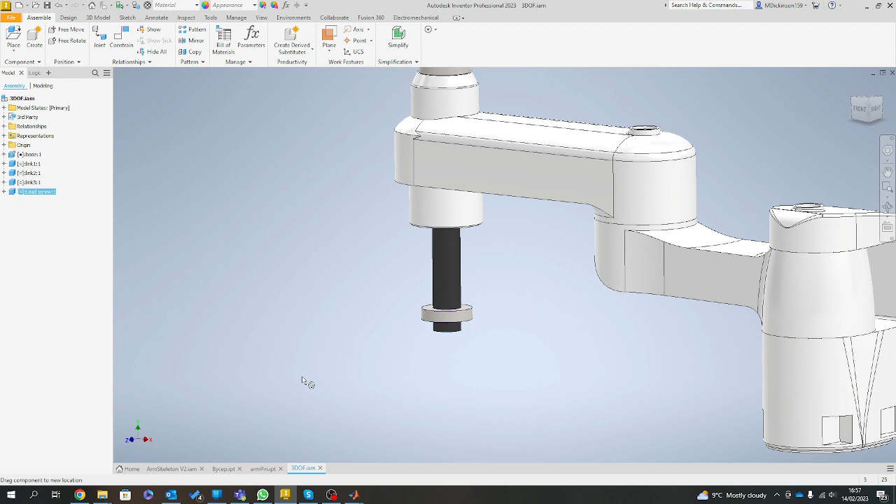In this case as well, we also used frames. If I just pan back to the original arm - if this was to be, I don't know if somebody actually told me what this was last year, I have no idea what the hell this thing is - but if this was to be something that was going to oscillate in some cases, we could easily do that.

But what you should now start to see is that what we've been able to do is remove all the complications of the CAD and all that, and now we're in a position of doing whatever we want to this, and it will tell us how well it will do it. Again, all I did in this case was a 0 to plus or minus 90 positional state - I did actually forget what I was doing, and that's where I went a little bit over.

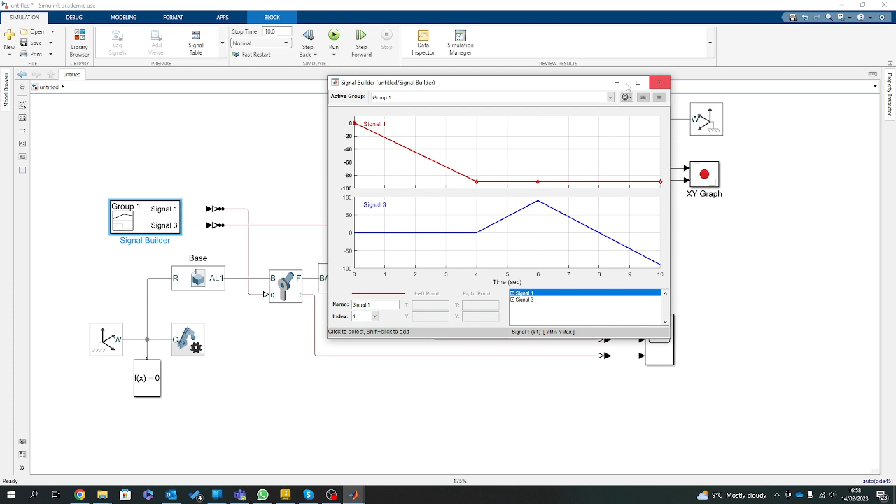Great thing is here, Signal Builder - Signal Builder will just do it all for you. It is so good. But do keep in mind, without setting key units, this thing will not know exactly what the hell it's doing. So if I set that to revs, the robot will just spin like crazy.